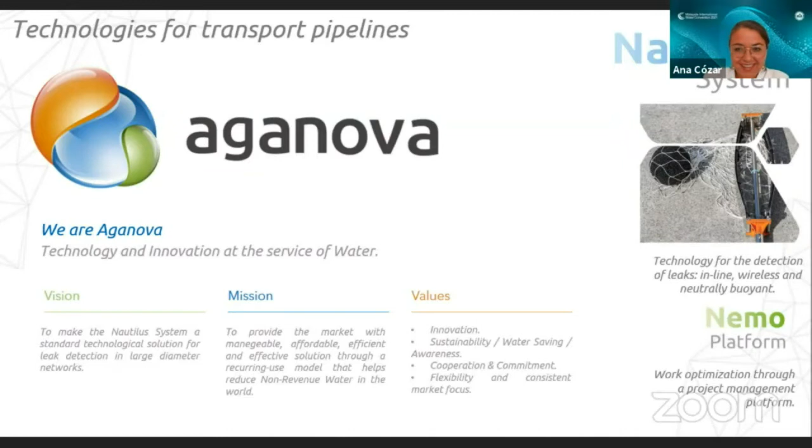Without more introduction, I'm going to explain the Nautilus system methodology. Nautilus is an acoustic method. It's a wireless, inline, and neutrally buoyant technology for water leak detection in big diameter pipelines. Many of the existing technologies in the market for leak detection are acoustic. This means that leaks are detected and located because of their sound when the pipeline is pressurized. These technologies, for example geophones, correlators, loggers, work from the surface, detecting the leaks from the surface where the pipeline is buried.

But there are many obstacles for leak detection in big diameter pipelines from the surface. For example, the material of the pipeline; sometimes the material is not a good transmitter of sound. The diameter of the pipeline itself; when it is very big, the sound is not well transmitted. Or in many cases, the depth at which the pipeline is buried. So the idea of Nautilus is to insert the acoustic method inside the pipeline to detect the leaks from a very close point. So we are very accurate in detecting leaks and anomalies, and locating them.

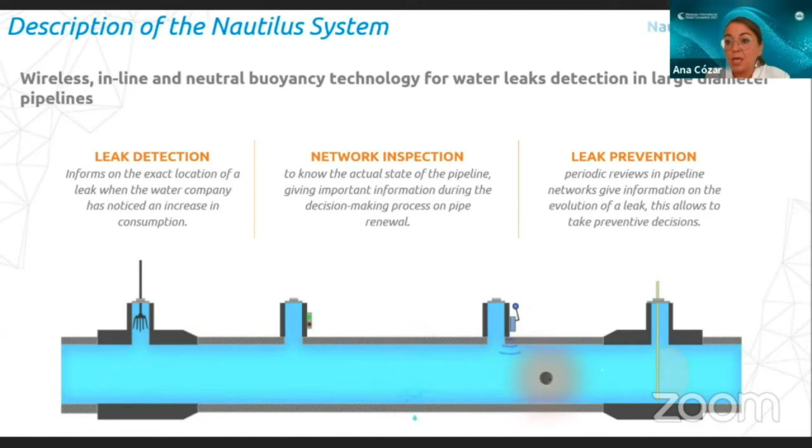point. It's very important to take into consideration that as the sphere travels free, it is important to close all derivations that could be in the pipeline we are inspecting. Now I'm going to show a video that summarizes what I have just explained.

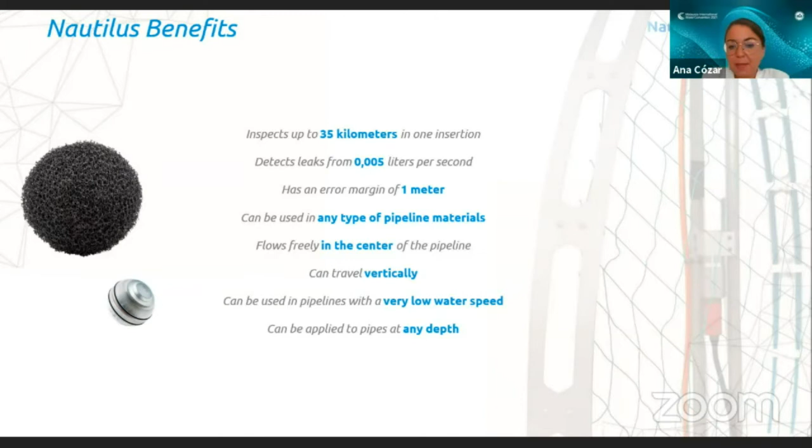This is to avoid encountering obstacles such as, for example, sediments at the bottom of the pipeline. It can travel vertically. It can be used at very low water speed. Of course, it can be applied at any depth. Let's just move on to the implementation of the technology.

First of all, let's see the minimum requirements to be able to inspect a pipeline with the Nautilus system. We need water flow. Of course, if there is no flow in the pipeline, the sphere wouldn't move. The minimum speed limit is 0.2. The maximum speed limit depends on the diameter of the pipe.

We also need to install synchronizers. The maximum distance between synchronizers is about 700 meters, and the installation of the synchronizer is very easy. We just need an element that is in direct contact with the pipeline, such as a valve or a hydrant, any element that is in direct contact with the pipeline we are inspecting.

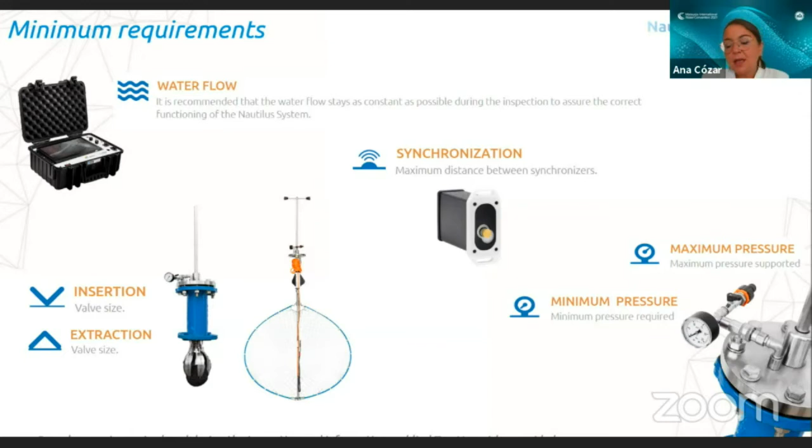Also, we need pressure. As an acoustic method, to be able to detect leaks, it's necessary to have the pipeline pressurized. Minimum pressure is 2 bars. Maximum pressure is around 20 bars. Finally, I'm going to move on to the insertion and extraction points.

The system includes the set of insertion and extraction structures. To insert the sphere, we need an operative gate valve of a minimum diameter of 80 millimeters. For extraction, we need exactly the same. We need an operative gate valve of a minimum diameter of 100 millimeters. The operation is very simple.

We couple a pressure chamber on top of the valve. We insert the sphere or the net inside this chamber, and then we close the chamber. When the chamber is closed, the operator can open the valve, and then we push the insertion inside. When the sphere gets in contact with the flow, it immediately starts the travel.

For the insertion of the net, the help is supported by a camera. So we insert the net, and we can see that the net is totally open and covers the whole diameter of the pipeline, and then we can proceed with the inspection.

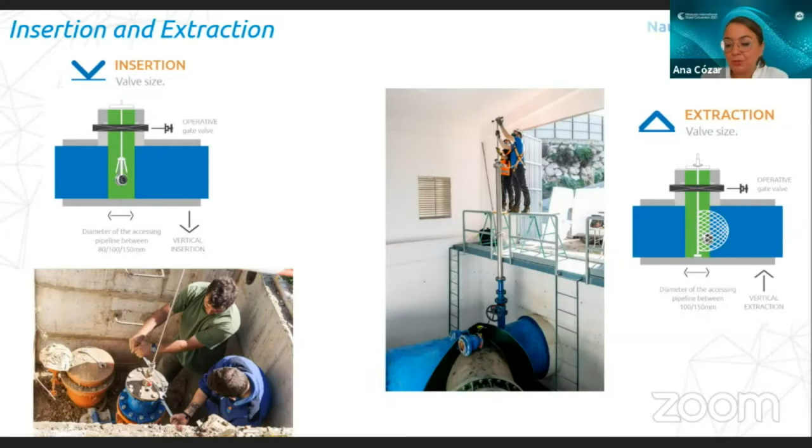Finally, the results. I'm going to show you in this screen what we find when we find a leak. Apart from leaks, let me just explain that we can classify these leaks in small, medium and large leaks, and we can also detect air pockets. If during the inspection we find other zones that are not normal within the pressurized pipeline, we mark this point to the client as an anomaly.

For you to have a better idea of what a leak is and how we detect a leak, I'm gonna show you an audio of a detected leak. In this audio here, okay, we have heard a beep, beep, beep. This beep is emitted by the sphere. This beep allows us to detect the sphere pass from the outside with the help, for example, of a geophone.

Now we have heard a tock, tock, tock. This tock, tock, so it was a synchronizer sound. And now we are going to listen to the leak.

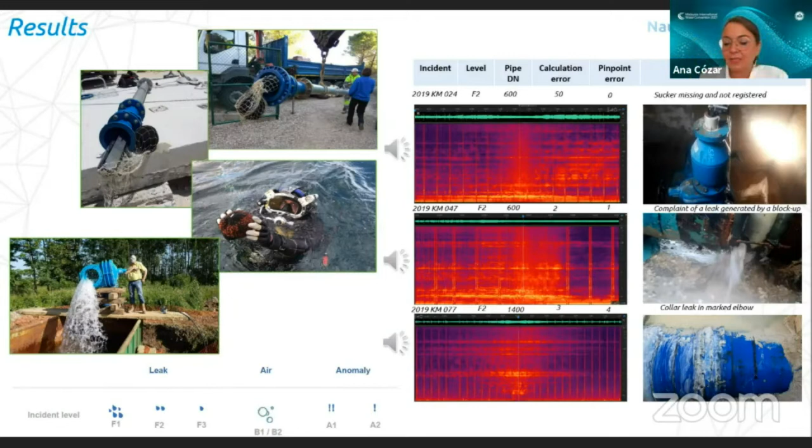I hope you have been able to hear this intensification of the sound, which was the leak. This leak, by the way, was a collar leak in an elbow. That's why the synchronizer was very close. So there was a leaking point just at the point where the synchronizer was installed.

Finally, as I mentioned at the beginning of my presentation, this year we have developed a new feature for our system. This feature is the NEMO platform. NEMO is a platform designed for the practical and effective monitoring of the leak detection campaigns. Through this

platform, the client will be able to see the planification of the project, the inspections that are already done, the inspections that are planned, insertion and extraction points, and all the information about the leak detection inspection. It also records the execution of the jobs, and of course, it shows the results of the leak detection inspections

and campaign. The client will also have access to this platform, so they can come back to the information from a previous campaign to have a starting point to plan a prevention campaign.

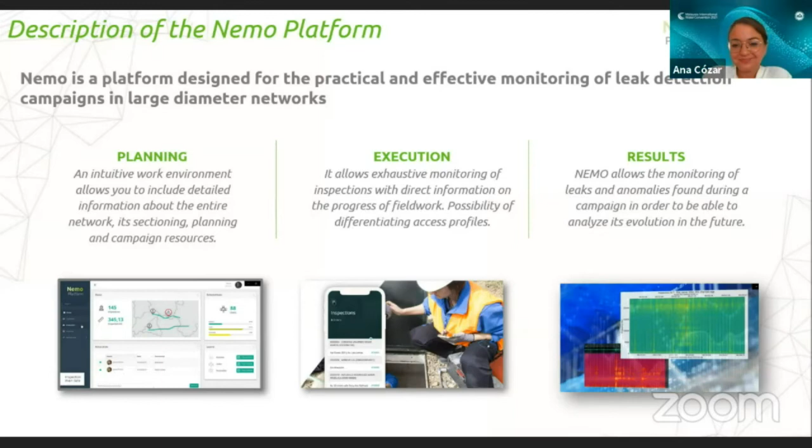I bring today a couple of examples of jobs that we have developed in the past. This first example was one of the first inspections we did here in Spain. It was a pilot project done for the Suez Group, in which they wanted to test the accuracy of the technology. This pipeline was a 12 kilometers length pipeline.

It was covering the center of a city. The pipeline was very old, and it was very difficult for the client because of the outside zone to review this pipeline and to get information about the situation of this asset. We performed the inspection in one insertion and extraction. The insertion was performed through a gate valve of 150 millimeters, the same with extraction, and we located 18 synchronizers

this time. After the inspection, we detected 21 anomalies, 3 big leaks, 8 medium leaks, and 10 small leaks. This project was a success experience that was the starting point of a wider collaboration with Suez Group, not just here in Spain, but all over the world.

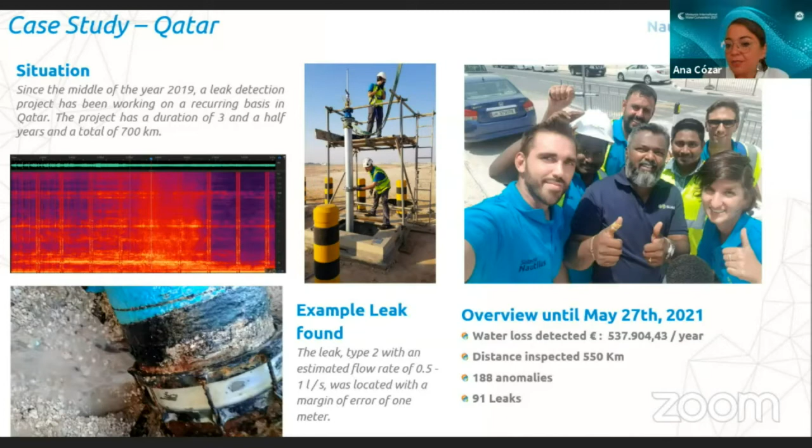In May this year, 550 kilometers of distance was covered, in which we found 188 anomalies and 91 leaks. This amount of leaks brings the client an economic saving of 537,904 euros a year.

We in Aganova, as I mentioned, are based in Spain, but we work at international level. To be close to our client, we have a partner in each country in which we are working, which is around 60 countries around the world. In Malaysia, we are working with Wavewater, as I mentioned at the beginning of my presentation, and they will be so kind to answer your questions if you address their booth this week in Malaysia.

We have worked in many countries in all the continents, and we have success experience around the world. We have covered more than 2,000 kilometers of inspections so far, and we are about to double this amount in the coming year.

And for your information, I think it's interesting to know that our system is certified to work in potable water networks by NSF 61 international certification. We belong to the very prestigious associations of SWAN, Water Europe, and Isle Utilities. The system is patented in 61 countries, and for management purposes, our company is certified by ISO 9001 and 14001 certificates. This was my presentation.